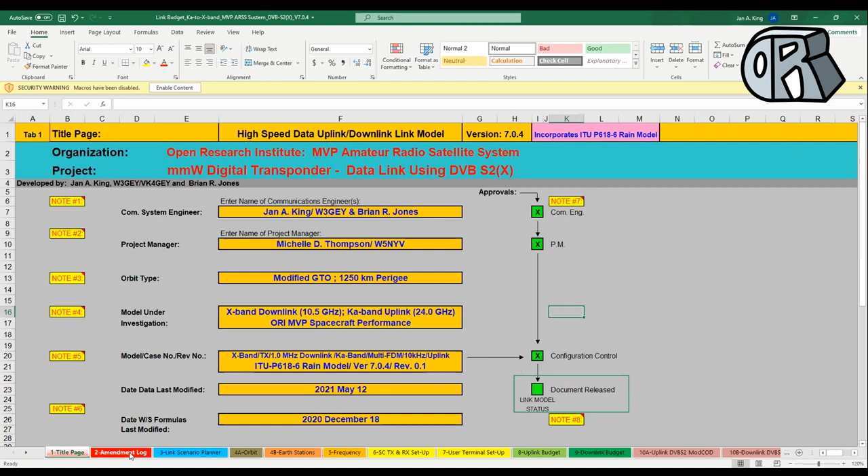Cool. So that was what the first page is about. And then the second page follows up. Every time you do a revision, this is what the revision tree looks like for this document. So it's been revised, and you see it goes all the way back to August of 2010. And some elements of this actually go back to about 2001. So this is long in evolution.

And what I try and do is use colors in a specific way. And I do this on every single spreadsheet I do on any subject: I make the blue cells the entry data, the yellow cells the results. And if they're black or blue, it means I can probably change it without stepping on the formula.

If I modify a cell and it's just a white cell with black text, I'd kill the formula, and I might as well start over, because the spreadsheet probably won't work after that, or I won't be able to change some parameter at all once I've screwed that up. So it's always a good idea with my spreadsheets, since I haven't password protected everything in them, to save a clean copy of it.

So you always have a fresh copy in case you step on cells, which I do to myself all the time. So that's it. Oh, I see something I forgot to do.

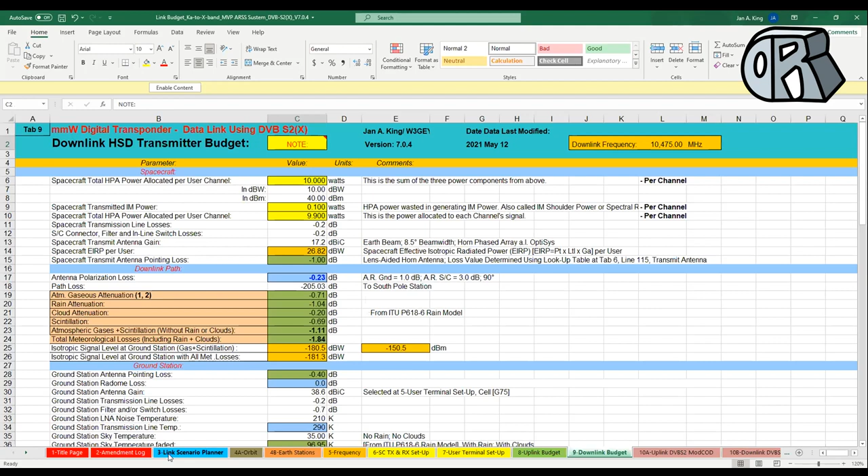Let's see, look at the downlink here. No, it's still a valid copy, so it's not going to prove that I'm doing it. Yeah, we ran into this before, because it looked like a valid copy on my Macintosh, and you said that's impossible. Yeah, right up until you change one of the critical cells, it will work. Yeah, because you had me. So the as-delivered copy works, and then after you make one modification, it won't work anymore. Right. So that's exactly what happened.

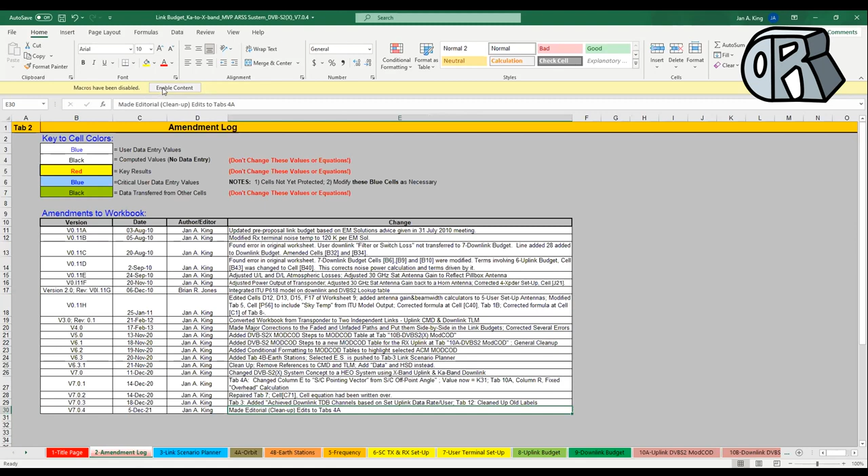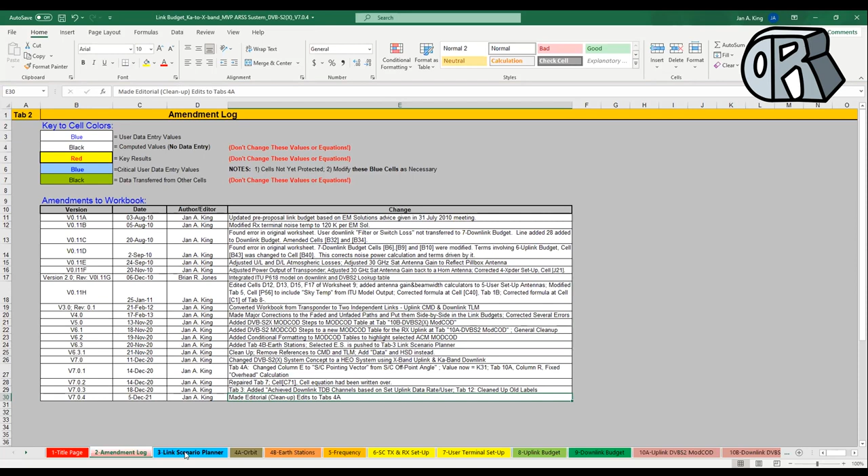Yeah. So if you've done this properly, you should get this inquiry here, where it asks you have you just enabled or disabled the macros, and so you enable the content, and so then now we have made it so that the ITU rain model will work in this Excel spreadsheet, and we got to still solve that problem for everybody.

It turns out the fix I gave you works for older versions of Windows 10, but not after about Windows 10.4. I think you and I discussed this, but there was a point beyond which, if you've got a newer piece of software, it will not recognize 32-bit words explicitly. You have to tell it some piece of information we haven't figured out yet, so it knows this is a 32-bit piece of software, not a 64-bit piece of software.

Exciting, and that's where we're hung up right now on that. This machine is an old machine, it uses an old version of Windows 10. And so when I put that DLL file into my System 32 folder, it does it and it works properly.

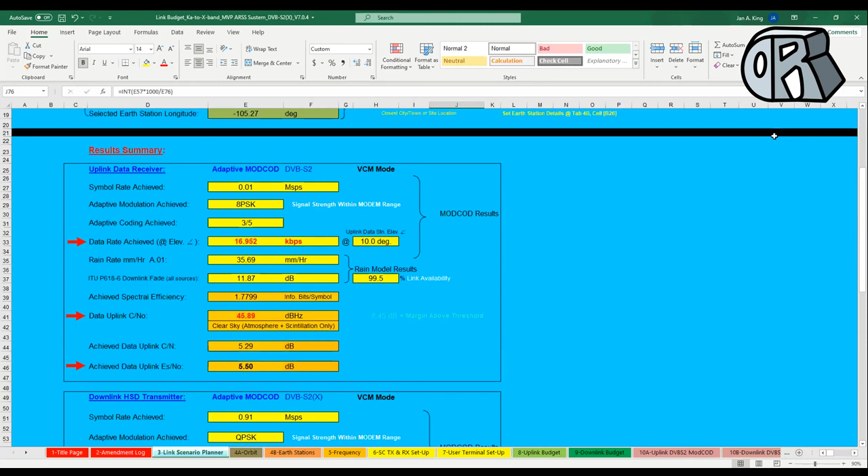Okay, so the way you drive this thing is I've put in what's called a scenario planner, which allows you to make quick changes to things you want to find out. And these are all the things in the blue area here. I've got two methods of changing the antenna size. One is changed on another sheet I'll show you, or I can alternatively use another antenna here. So I have two ways of defining antennas.

Specifically, on the user terminal setup, I do it there, and the other way is to do it here. The upper one assumes that the antenna size for the uplink and the downlink antenna could be different, which could easily happen in the amateur service. Whereas if you have the common antenna for up and down, it assumes you might have a diplexer or something, with two different feeds on the dish. So it depends on which one you'd use there.

I select the receiver bandwidth, but the way I've got it set right now, it's kind of from some old commercial stuff. It gives you an option of what ones you can pick. And if you don't like that, you have to go over to this section over here on the right and load in different options. And that's kind of clunky right now, so that's one thing I don't like.

So I've got it set now so the receiver bandwidth is very narrow and the transmit bandwidth is as wide as it can be. That means we're kind of operating the downlink as a combination of all the uplinks. So think of the downlink as a TDMA and the uplink as an FDMA, but it could be an FDMA or CDMA type of link. Right now, I'd say this is just until this was socialized so we could figure out what we really wanted to do. But this assumes 10 kilohertz channels, and at these microwave frequencies, that's pretty narrow to try and keep track of.

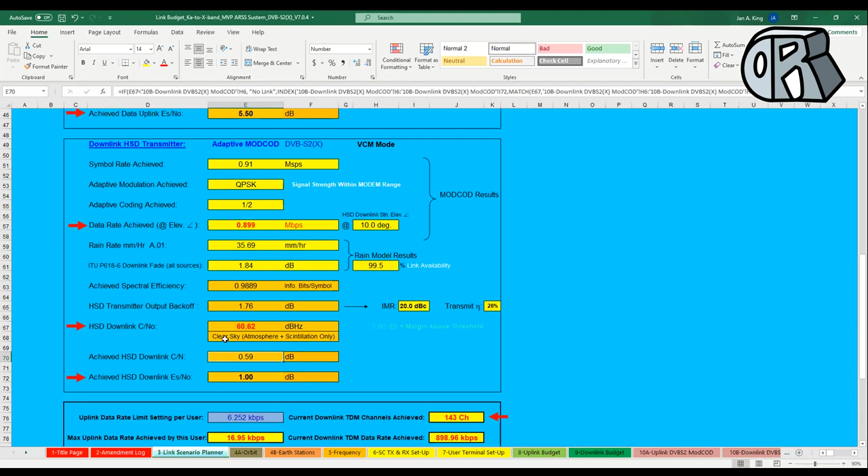It's really cool. Okay, now I put this new thing in here because it's a discussion area. If you assume that every bit that goes up, give or take some control bits, is going to have to come back down, then the downlink capacity—my metric here has been that with a 6U spacecraft, I wanted to be able to tell the commission that we could support a minimum of 100 voice grade communications conversations, which means 200 users minimum could be supported with this asset.

So if I use 6.25 kilobits per second as the threshold for the data rate that must be closed by the average user, then I can have an average channel count on the downlink based on the fact that I could get 899 kilobits per second. If I had to divide that into 6.25 kilobit chunks, I could support 143 channels.

However, the link on the uplink supports 16.95 kilobits for this particular user. So is that confusing in any way?

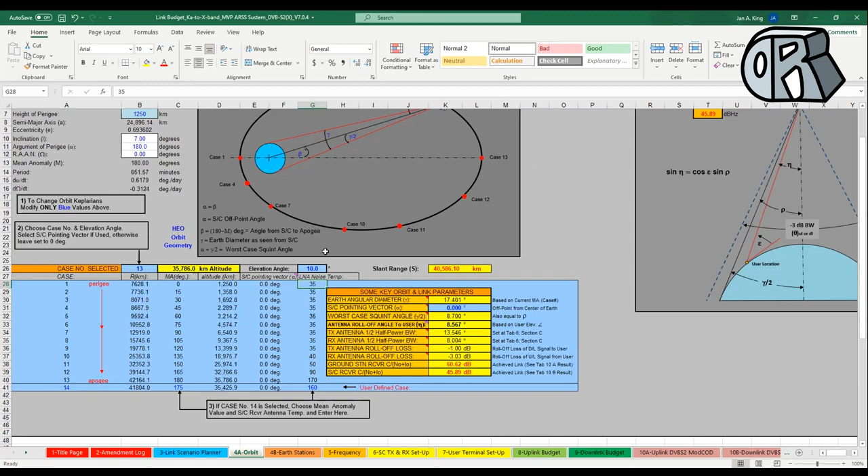So anyway, what happens here is I can pick any spot I want around the orbit. Now, there's some parameters involved.

This alpha value is what am I going to do with the boresight of the main antenna that I'm pointing the spacecraft with. In other words, if this is a dual frequency antenna, the boresight of that antenna could be offset from the instantaneous line between the center of the Earth and the center of the spacecraft. I could off-point from that, but I've made the assumption here that value is 0, and you'll see it expressed in this cell.

That's cell K31. That cell allows me to offset the angle of that antenna. But what I'm assuming by putting that at 0 is that alpha is always 0, regardless of which case I pick between case 1 and case 13. Another way of saying it is I'm always nadir looking with that antenna.

So is that okay? Well, what kind of station keeping is required to do that? Normal station keeping that you would require for any LEO system, or any system that has an antenna with the gains of the kind we have here. And we can talk about that.

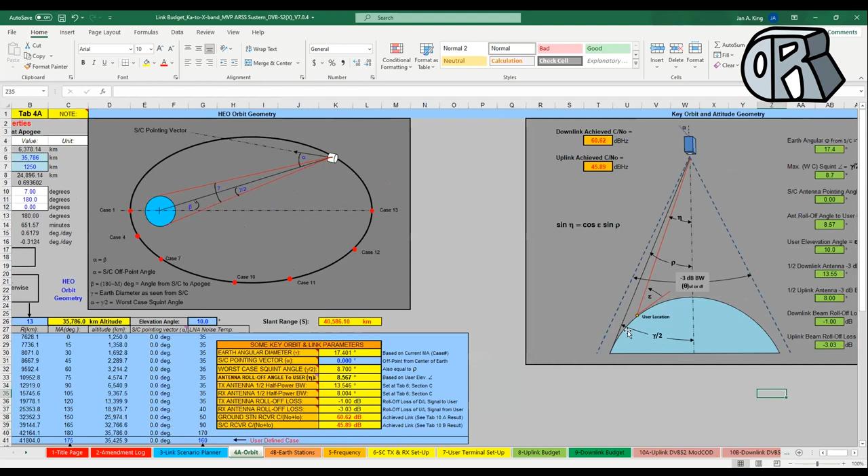And it's telling you also what the nominal period of the orbit is. Here we go. I can't draw my own. There. Okay, now I got it.

All right, so over here on the right, what we have is a pictogram of what's going on. You see that parameter up there at the top, alpha again. So that's how much I'm off pointing this thing. But it's telling you now where, with respect to the user, is this beam I'm going to place.

So you can see that the zero elevation angle, which is the rho parameter here, is defined, so you can see how much of the Earth is illuminated in degrees by that angle. You can tell what angle the user is at relative to the beam center. So the beam is going to be centered on this line. And then I don't recall anymore what my blue cone is.

But anyway, again, I can see what uplink and downlink I've achieved. And these are all, this is just an observation table. You don't change anything in this table because you'll see there's nothing that's blue. But the main thing is you can see for this user at 10 degrees elevation angle, how much downlink beam roll-off has occurred and how much uplink beam roll-off has occurred.

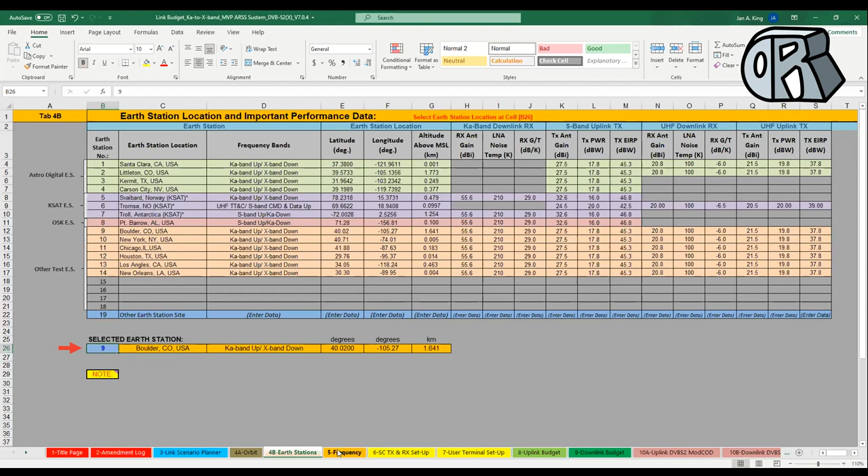Okay, the next one's the standard gobbledygook. You got to put in the mean uplink frequency and the mean downlink frequency. This displays the bandwidths, the path losses. It's a summary giving you the elevation angles. Again, almost every data sheet gives the slant range, everything you need to know about the link. If you've got a bandwidth, it's also telling you the upper edge and lower edge of the band here. So if you modify the bandwidth in this channel, it gives you all the right numbers there. It's just a handy spreadsheet thing to have.

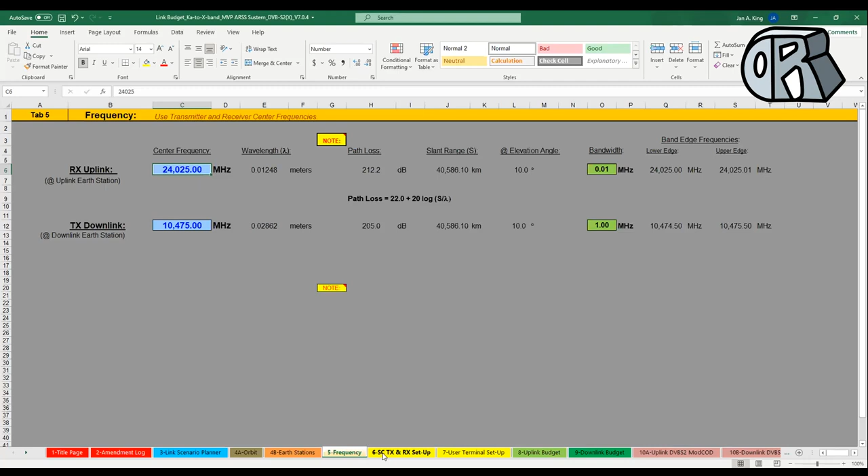Very good, all right. Now we get on to the serious stuff. This is how I set up the transponder - this is the page that sets up the transponder. I probably won't go into a lot of detail here, but again, remember, I only changed the blue values.

So what I've got, and this you'll find, of course, not a big surprise, is one of the most critical parameters in the whole system is what is the maximum transmit power.

Wally, to your discussion about intermod and things like that, I can set in the output back off that I use, and then depending on how much I back it off, the transmitter DC to RF power efficiency will change. So if I put 3 in here, this is going to drop down to like 20%, but the intermod will get better. So you have to know for your SSPA or HPA that you're using what the 1 dB compression output power is, how much you want to back it off.

At that back off point, what is the efficiency? Because it's also going to tell you how much spacecraft power you need. On the final page, it tells you, okay, you need this many watts if you want to run the system this way. Then you have to measure probably either the noise power ratio version of the intermod or the third order intermod products, whatever you want to do, and you can represent that there. But that's actually used in the final to subtract off the power that's creating the intermod from the useful power of the transmitter. So it's actually used in this system to offset the power that's wastefully used in producing intermod.

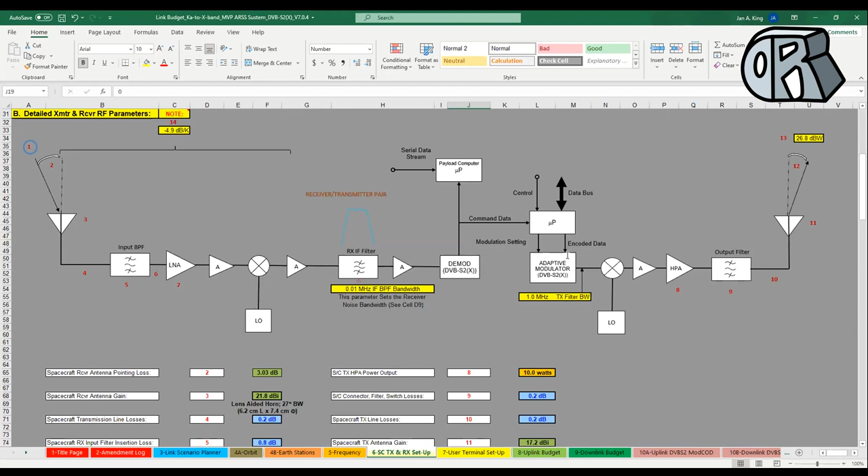Then it shows you a little pictogram of what the transponder looks like, and it gives you the ability to change all these parameters. So without belaboring the obvious, the one that you're going to be most interested in generally, here's where you put the antenna pointing loss.

And it's telling me that's coming from another data sheet too. That's over in the Orbit 4A tab, which allows you to set the pointing loss. But the one you're going to care about is I have 2 antennas in my version of the system.

This one for the uplink is a lens-aided horn. It has a... that doesn't sound right, that's not right, it's not 27 degrees, is it? I think the beam width is a little narrower than that. It's about 20 degrees, and it has a gain of 21.8. I think I've got a bug there.

Then you can set all of the usual things for the noise, which establishes the system noise temperature. And over here on the transmit side, it's telling you, yeah, you picked up 10 watts before. Then it allows you to have filter losses and line losses going to that. And it says your antenna gain is 17.2.

This one has a 16-degree beam width. And I again have a pointing loss, given by one of the other spreadsheets. I've got in there for the pointing loss allowed 1 dB. That gives me a net EIRP of 26 dB. And it also calculates, for those who care about such things, the G over T.

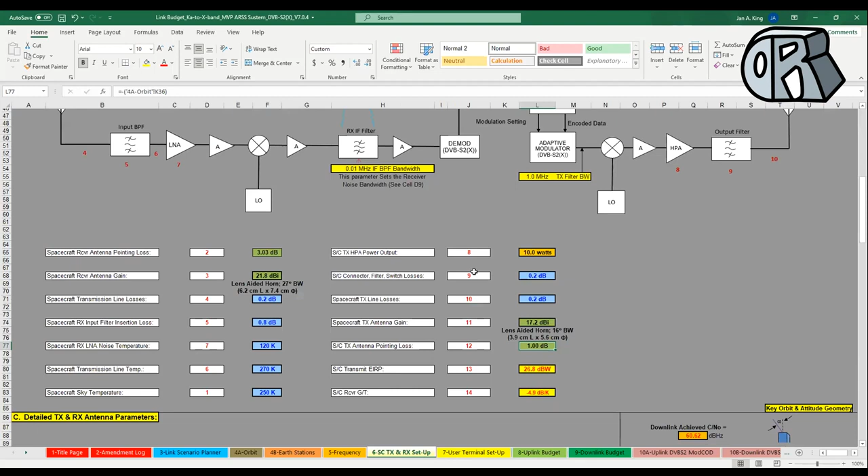But okay, let's go then back to here. So we're still calculating, but you see there's a lot more. No, okay, here it is. Here it is, okay, so this is to properly define the antennas.

Now you'll see we have our friend over here, this graphic again, because it's useful in setting these to see what it does. What we've got is a frequency of thus and so. If the antenna... now this assumes, guys, every antenna is going to have a different kind of equation to set its gain relative to, and its beam width relative to, some parameter of the antenna.

So just assume that this is a dish that I'm doing. It's the size of the dish that I would need with this aperture efficiency in order to produce this gain, and it has this beam width. So I was right on the beam width, okay?

So an antenna that's 7.4 centimeters across at 10.5 gigahertz, and there's no parabola, there's no dish that's going to have an 80% aperture efficiency. A good high one would be 60-something percent. So this is telling me this is a horn antenna. They have about 80% efficiency, and their aperture size isn't that different.

So this is a little bit of a fudge, but what you want to do is get the approximate antenna parameters between the antenna diameter, if you call it the equivalent of a dish, and the equivalent dish aperture efficiency, such that it comes out to meet the gain you know for your horn. So I know I have a horn with 17 dB of gain, and I bump this up until I get that gain.

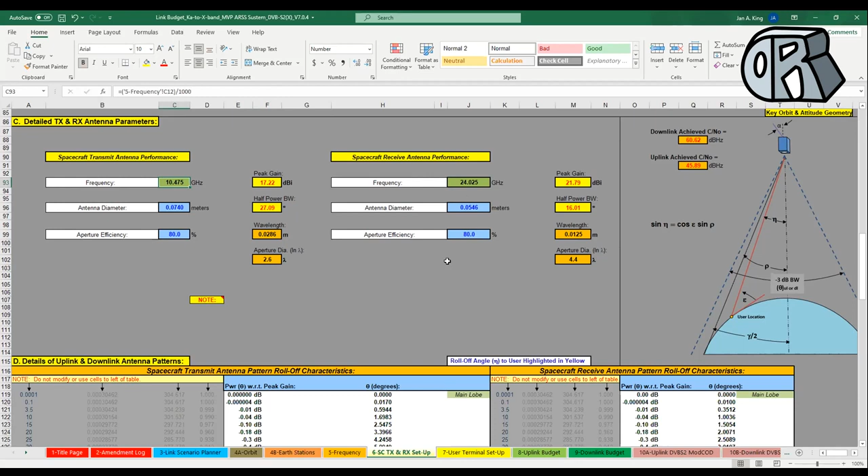Now, once I define them, I used another tool I developed a long time ago, and I say, okay, if I put that antenna in and I assume a sine squared theta over theta squared, which is what you'd call the standard linear taper beam pattern for a dish antenna, it works real well for a horn antenna too. This is the angle from boresight over here in this column.

This is the angle from boresight in this column, and this is how much the beam rolls off. So this is the transmit antenna beam. And what it's saying is, this is the roll-off you get in dB for this particular angle.

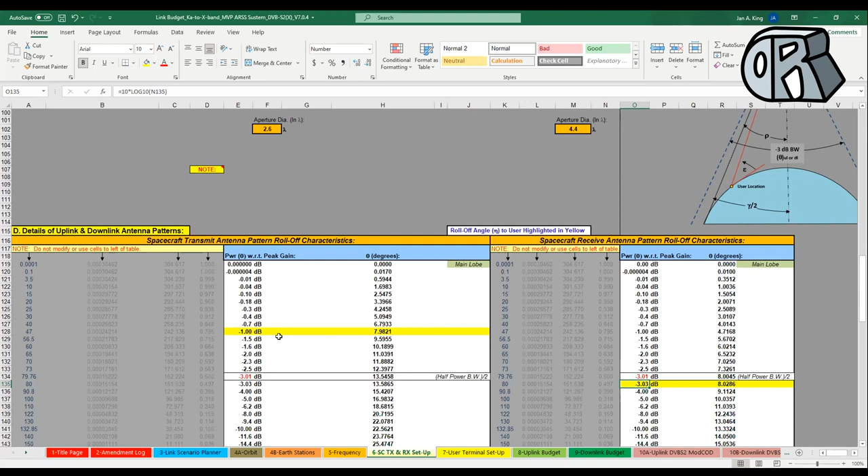So as I change the link parameters, this yellow line dynamically moves up and down the page. It's telling you where the user is relative to the beam pattern. And as we move off, look what happens if the beam pattern moves down to this area, which it very well will. I'll have a loss of infinity in dB. Yeah, wow, I mean, 328 dB.

So you're in the null. And so, when you're in that null, you're not going to communicate. So that user, the ring all around for whatever elevation angle corresponds to that case, all the way around that ring, around the Earth, centered on the Earth center, there's not going to be any communications.

So you have to plan how that works in the way the system operates, where you are in the orbit and that kind of thing. There will be times where certain elevation angles will be in a null scenario, and there'll be some cases where it'll actually be able to perform and the link will close all the way out in the first side lobe.

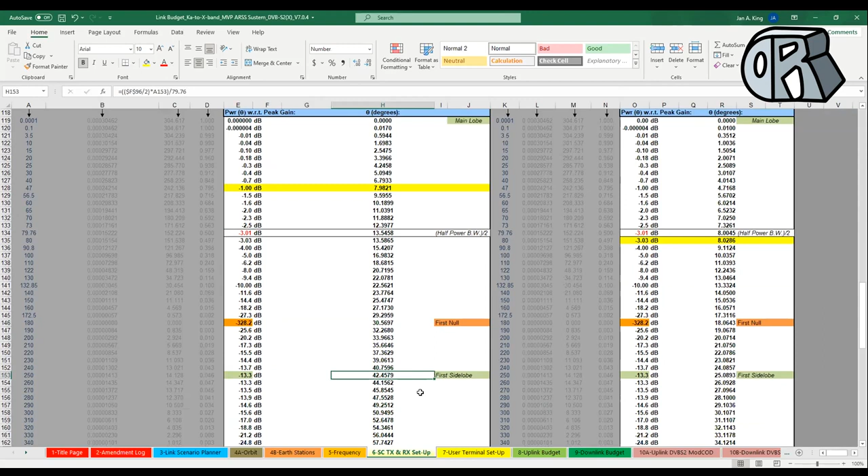We can show some of the cases here, but you have to be aware that as you move away from apogee, if the beam can't adapt, then two things happen. One, the user will be, on average, further off the beam boresight. And second, the spacecraft will be closer to the Earth, so 1/r² is a lower path loss. So the link will just improve because the path loss decreased.

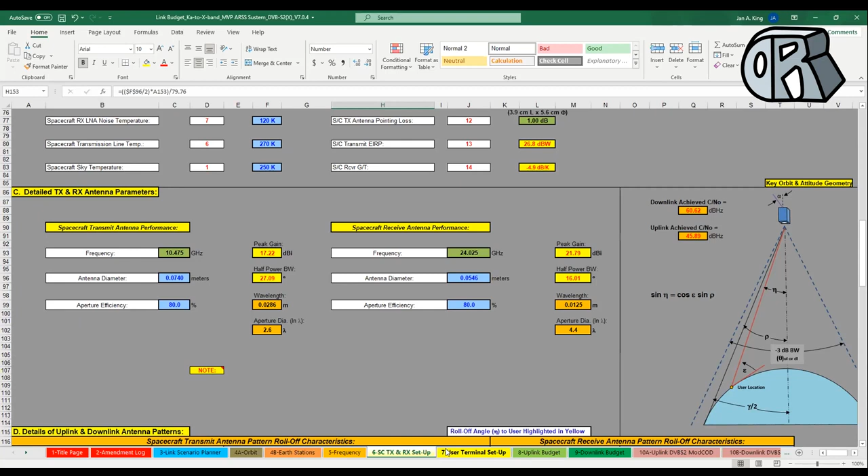So all that is figured out in this link model here. That finishes with the spacecraft setup. Once you've done that, you've set up everything you can, and then you have to go to the users. And this is a lot more easy to figure out.

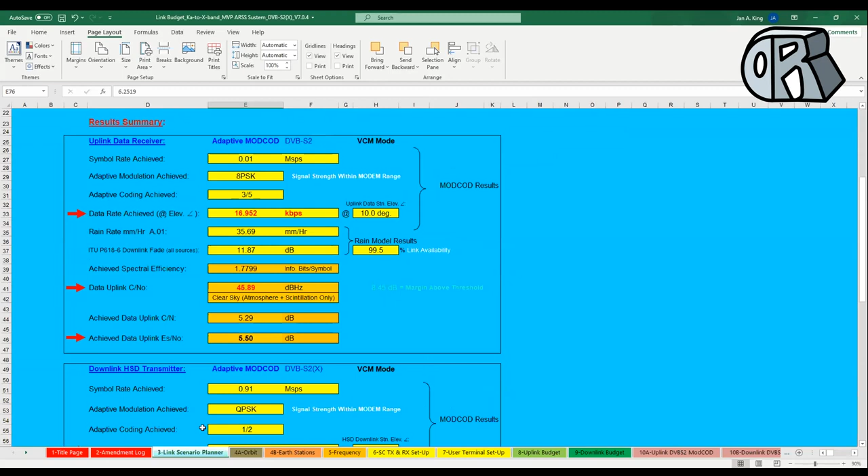If you play with this antenna here, and I say yes, then it will apply to the link equations, the link budget, this antenna, which has this gain and this beam width. If I select no here, it goes over and will select the gain you picked off that other choice on the link scenario planner. Let me do that real quick. Up here at the top in the link scenario planner, you can check this box and uncheck these boxes, and then you'll be using that particular size antenna.

This is a little bit complex, I agree. You'll be controlling it from this box here. But you see, it tells me I've not selected this. If I say no, then it says selected over here and not selected over here. If I say yes, it swaps them around - selected, not selected. And if, again, I say no, no, and I go over to the link scenario planner, it will have changed the check boxes. These two become...

No, that's interesting. Actually, I have to select no on the other one too. And that's correct. So I have to go down here and say, nope, I'm not going to use this antenna.

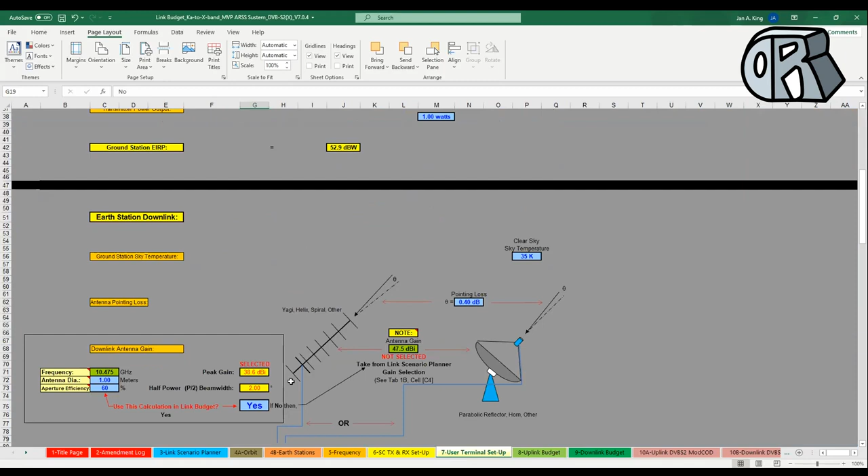Now I'm operating in what you might call a duplex or diplexer mode, where I have the same antenna and it goes through to a diplexer, and you sort the transmit frequency and the receive frequency in the diplexer, and then you've got two coax cables, one going to the transmitter, one going to the receiver. So you can do either mode of performance here - you can assume the user has two antennas or one antenna. Yeah, and that's how you...

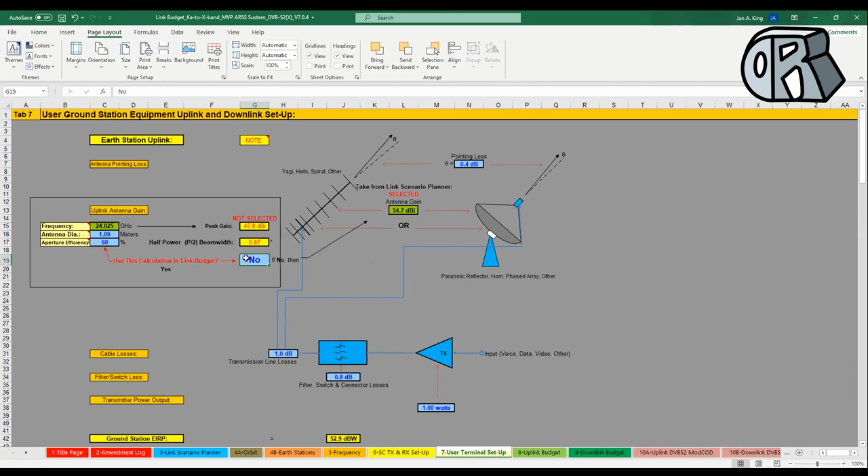That's pretty trick, and it is not... there could be an explanation here. Eventually - oh, there is, yeah. Let me see - is there like the notes on the page? Probably - oh there it is. Okay, yeah, thank you. I try and put all these notes, and by the way, got to use the notes sometimes to figure out what's going on.

Yeah, that's pretty trick though, that's a tremendous amount of customization. Here's the key one. Okay, yeah, all right. So we got the user terminal sorted. What I did here, and now this is how I am using the spreadsheet, is I put a 1 meter antenna in for transmit and receive, so I could play with these parameters while I was doing it.

And I've got 60% aperture efficiency, which would be like an offset fed user antenna. So I assume the user is using a microwave antenna he would have bought from his TV dish store, where he gets it and then modifies the feed for his use. Yeah, but basically it's an offset fed antenna, so it's a little tricky to point for the average user, because the boresight doesn't align with any physical feature on the dish.

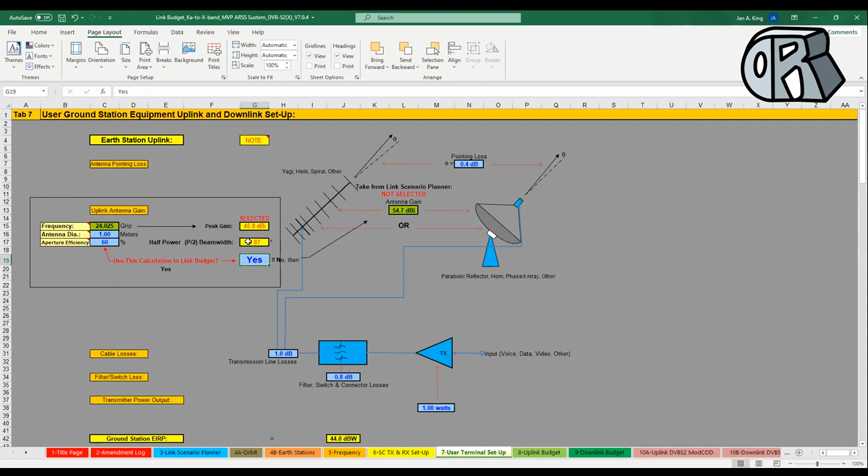So it's hard as hell to make sure - you can't just go out with your eye and look at some reference point in the sky like a star and say, okay, I'm about right. You've got to calibrate your system. But anyway, that's what's in here right now: the cheapest antenna I could get for a guy was an offset fed 1 meter dish, and it already has a beam width at our frequency of 0.87 degrees, which is damn narrow.

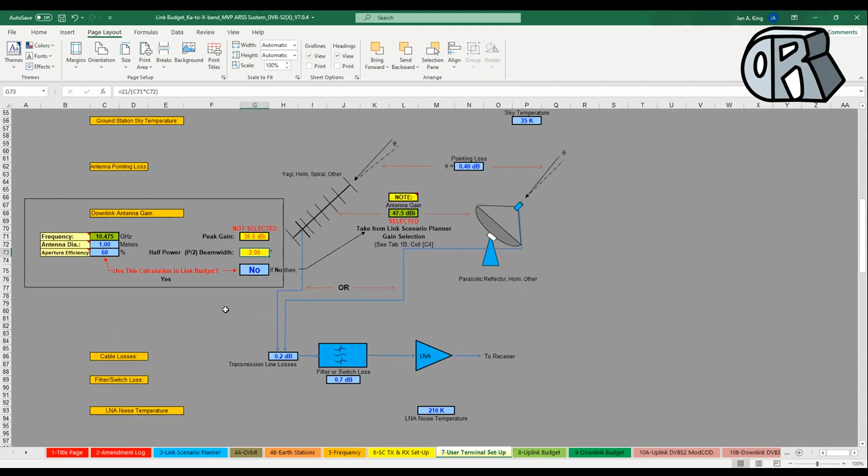Same size antenna down here for the user on the downlink, which goes to the issue of, if I make it easier for receive than transmit, then he can slop around in 2 degrees - which is still pretty damn narrow, but he can slop around in 2 degrees rather than having to point to 0.87 degrees, which he needs for transmit.

Also, with transmit, if you put the right software feature in the spacecraft, he might be able to walk himself in if he gets feedback from the spacecraft saying, okay, your signal to noise ratio right now in the channel I'm receiving you on, using some GUI or something, is 6 dB. Oh no, now it's 8. Oh, it's 9. Okay, so he uses that to walk it in. He can walk in the transmit, whereas he needs the feedback he gets from his receiver to lock in the downlink beam.

Right, and I assume there's going to be some kind of beacons here and there. We haven't talked about frequency referencing and all that, and that's a whole other chapter. No, in this thing, it's a whole nother chapter, and we do have some work there, and some engineering and some ideas.

So this is the area for the ground station where you put in whatever the LNA temperature is, noise figure. I don't have it. If you want, I can put in noise figure here, and I've got a little calculator. I can put a little calculator over here in the empty space, which allows you to go from noise figure to noise temperature and noise temperature to noise figure, because hams are needing that all the time. So we can do that.

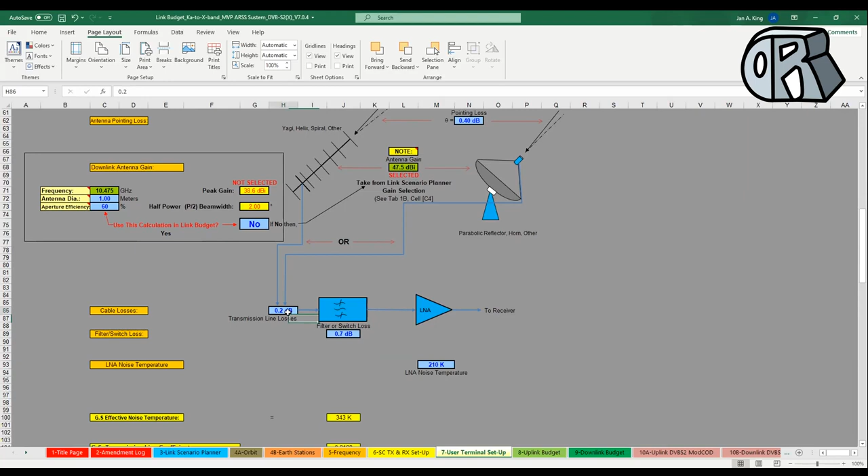But anyway, I've got it in proper engineering terms. So it's noise temperature. If you have a filter like a bandpass filter, typically the losses you want to get below a dB, and then whatever your transmission lines, you want this all very close to the feed so you get this loss down. We all know that, but anyway, that's where you enter the parameters.

Here's where the pointing loss of the ground station receiver goes, and this gets fed into the link budget. And it's good to know at any given frequency roughly what the clear sky temperature is. Right, and that will be very much elevation angle dependent. So the way my link budget works, it assumes kind of a constant value for that. And even in a clear sky, actually, that does vary a little bit.

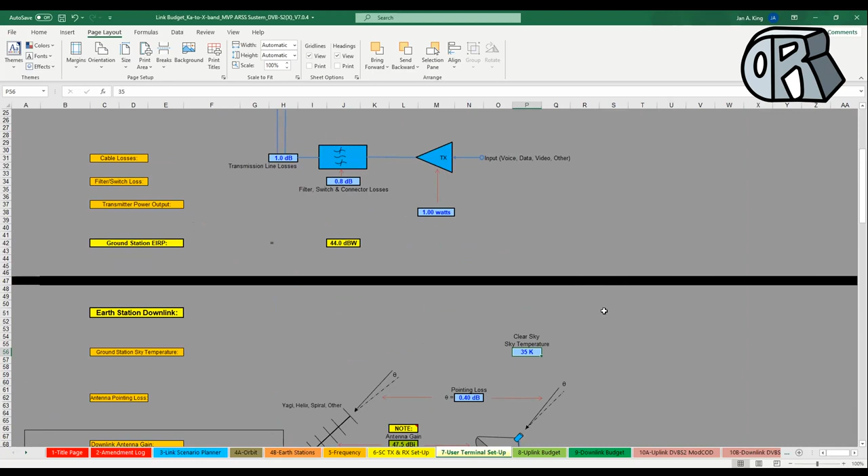So I call that a fudge factor. And what I have in there is my best guess at the fudge factor for that frequency and medium elevation angle. Okay, so that's blue. That means that's the responsibility of the user - anything that's blue here is expected, you've got to fill it in, and it will affect the link budget.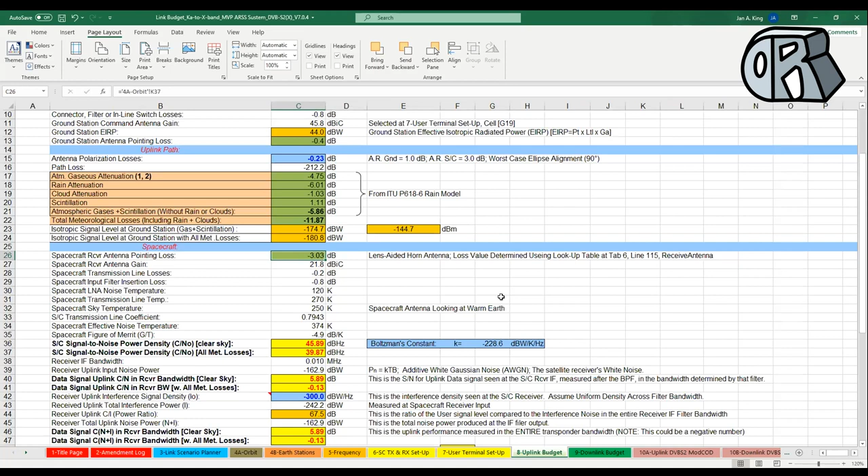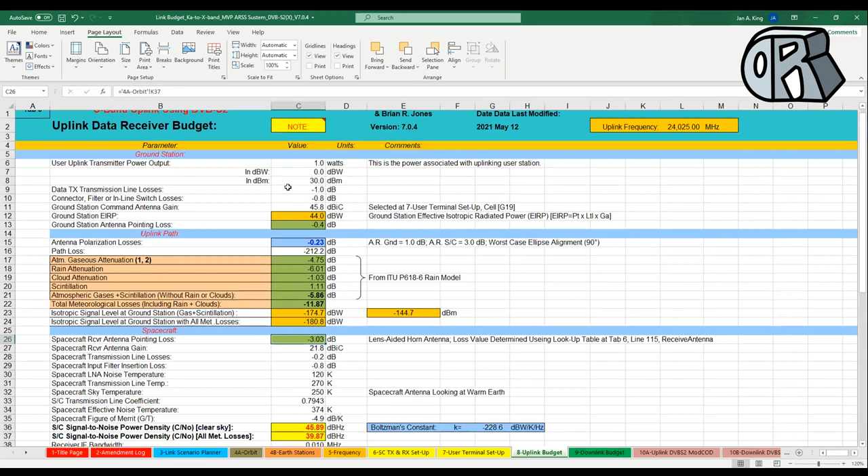So then we go to the links proper, and this should look like a properly documented and annotated link budget. And the most important part of it, it looks pretty much regularly, like you'd expect to see. It's got all the pointing losses. It's properly computing, and a parameter you need to know is the axial ratio of the antennas you're using. So you'll see, where the hell is my axial ratio?

Up here. Polarization loss. Okay, that's a big one. This is the main spreadsheet where you have to put the polarization loss. You guys, from some of my other spreadsheets - either get one of my other regular amateur radio spreadsheets, or you can implement the formula yourself. But you need to know the axial ratio of the transmit antenna, the axial ratio of the receive antenna, and then the angle between the two ellipses that are created by the two antennas when their axial ratios aren't perfect.

And what this is telling me is that the axial ratio of the ground station antenna was 1 dB, the spacecraft antenna was 3 dB, and it's the worst case ellipse alignment. So the two ellipses thus created are in as cross pole as they can get. And under those conditions, where I have a 1 in 3, the loss is minus 0.23. But that is a user entry.

And I realized that I've got lots of spreadsheets that calculate that, but I didn't put it here. And if a user is going to use this, he'd benefit from having this be an equation. But for big guys like us using this, I'm assuming you would know how to either calculate that or estimate it for what your system is. But the polarization loss is, to a lot of people, is a big deal these days. And so that's where you play with it.

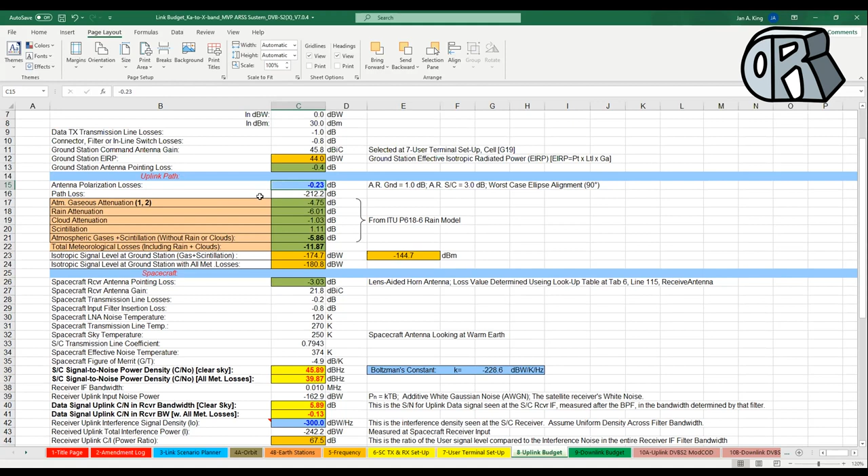Okay, and I wanted you to know that I do take into account - that's a downlink issue, so let's just stick with the uplinks. I don't deal with the linearity of the user on this link, Wally. The user's IMR, intermod ratio, or intermod losses is not really taken into account. I'm assuming that the ground station takes account of that in the transmit power here. So that's one higher level of sophistication I could add here that I haven't. However, I take care of that on the transmit side of the spacecraft. Yeah, on the downlink side, does it make sense to stick an implementation loss catch-all?

It's a good idea to put that parameter in there if the implementation loss across the ModCod steps is fairly consistent, then it could be easily put as just before the bottom line of the link budget on the downlink. If it changes by ModCod step, then you have to put it into the ModCod table. We haven't got to that yet.

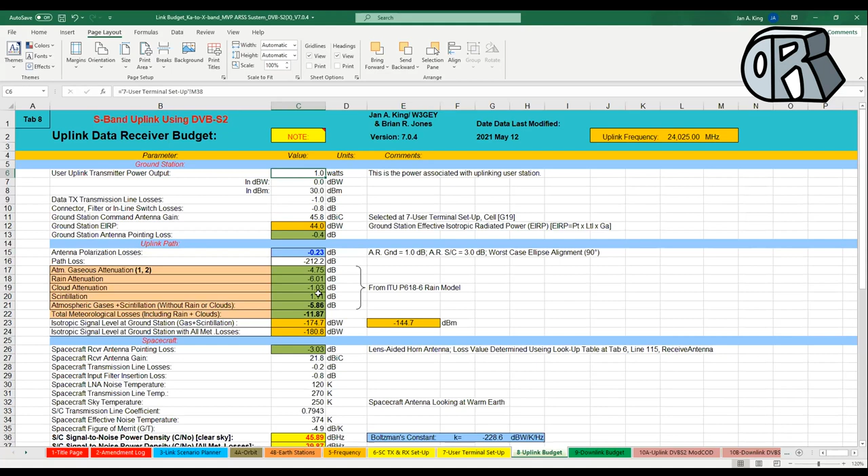So anyway, this is just everything standard, except what I'm doing here is I'm allowing you to pick between. Once we get into the part where the rain losses occur, all the rain losses coming from the rain model are plugged in here, and these are the sums of them. Then from here on down the link budget, I compute the rain-on case and the rain-off case. That's what you see, these two parallel numbers. You see them again here and here and here.

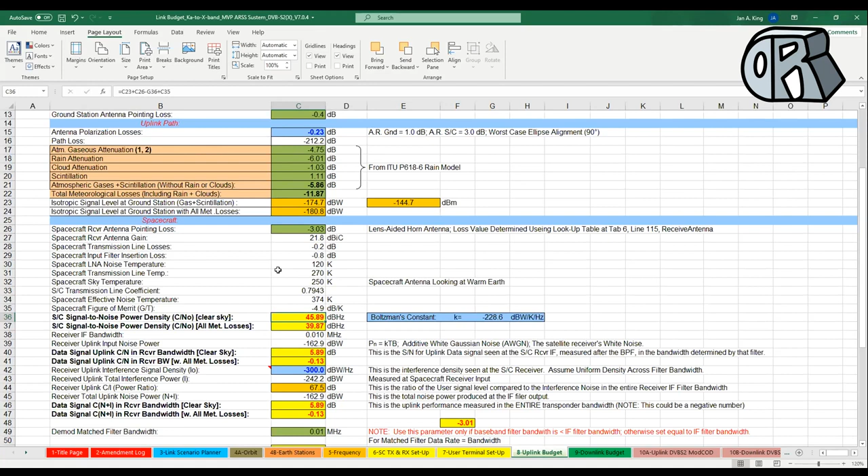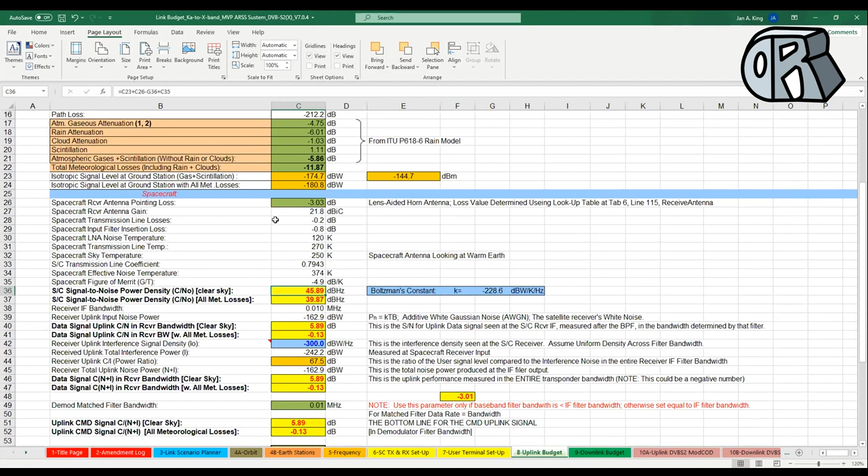So each time I apply some correction, there's two versions of the outcome, and they're carried. If I turn on the rain, it copies the worst value. If I turn the rain off, it takes the best value in each case. But the things I correct for here are the Met losses.

This is where I've computed the net effect. This is the number I would nominally use to do the ModCod table lookup. In other words, this is the end result of the link, except I haven't yet accounted for noise power in the receiver, and I haven't yet accounted for interference on the uplink.

If I've got an interference environment I'm in, let's say I have something producing white noise that's going all over my receiver channel, I can put in the density of that noise here, and it computes the noise power of that, and then it figures out how much that degrades the link. Okay, for that case, if you want to see it go worse, I go minus 200.

Okay, and you see the link goes to crap because I put a very high interference density into that case, into that scenario.

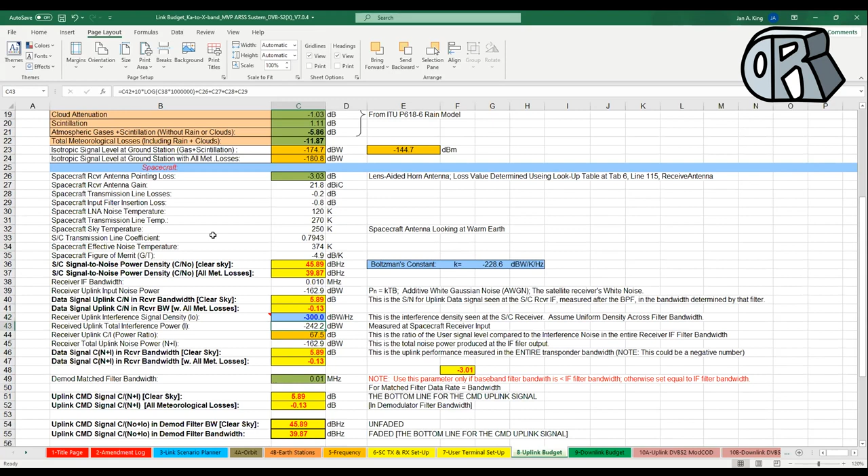Then I end up with the classic signal to noise ratio. It's the signal to noise ratio considering the noise also includes an interference, and that interference is defined by that blue box above. So if I turn off the interference so that it's really C over N plus I, but I is 0, then it becomes C over N. Anyway, that is the bottom line as far as putting it in terms of signal noise in a given bandwidth.

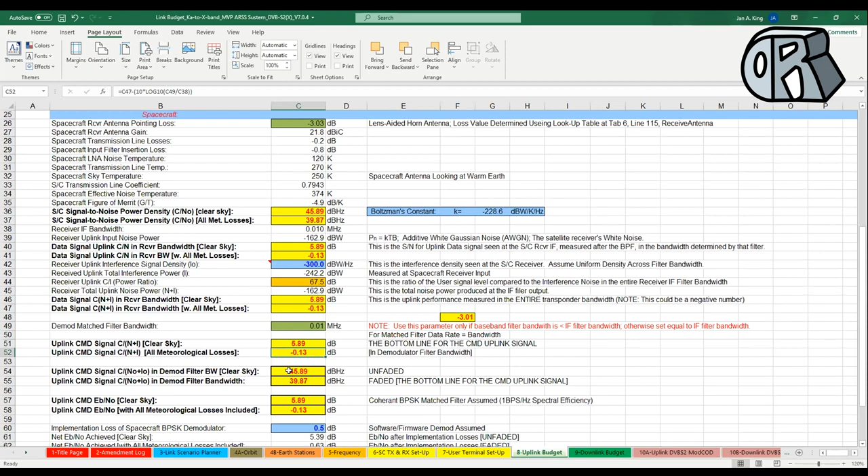There's the bandwidth. So I come up with the net effect. That's in the transponder, and then this is in the user's receiver. And since they're identical, it doesn't change. And then I have a clear sky and a sometimes called unfaded and faded clear sky, and C over N0 plus I0. So I take that one into account.

And that is actually the number here that I'm using in the ModCod lookup table. I also calculate, for the DVB-S2 table, if some people would like to know, the net Eb over N0 parameter. It's another way of saying the signal to noise ratio, but it's the energy per bit to noise power density number. And so that's given here as well.

So this part down here is where there is an implementation loss taken into consideration. But since I've essentially disabled everything down here, because I'm going on to the ModCod tables, and I'm using a DVB-S2 demodulator, fundamentally I haven't really used this, but here's an example where I put the implementation loss into the link. Prior use of this spreadsheet, I was apparently using it for a BPSK link, and I had assumed that the demod had a half dB implementation loss.

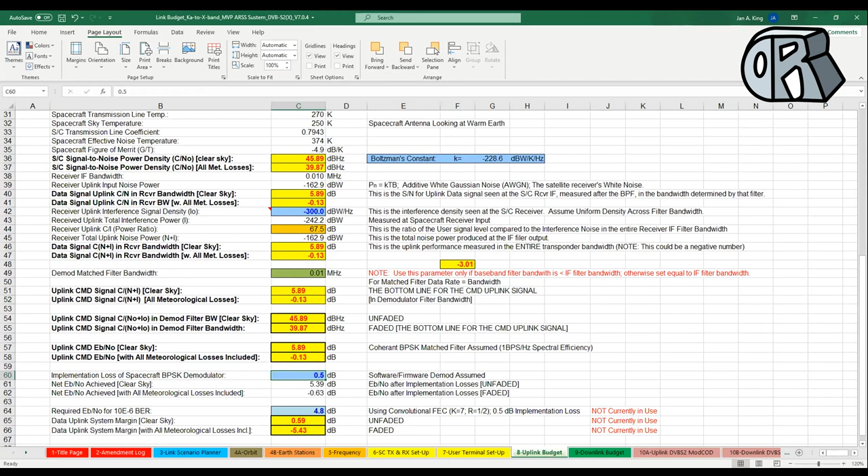Now, if we go to the downlink, the only thing that might be different here that you haven't seen before is I calculate the intermod power from the intermod value that's in here. So I say, okay, I got a 10-watt transmitter, but I'm producing intermod 20 dB down, say, so I have an intermod of 0.1 watts, that's 20 dB below 10 watts. So I'm losing 0.1 of a dB to the intermod.

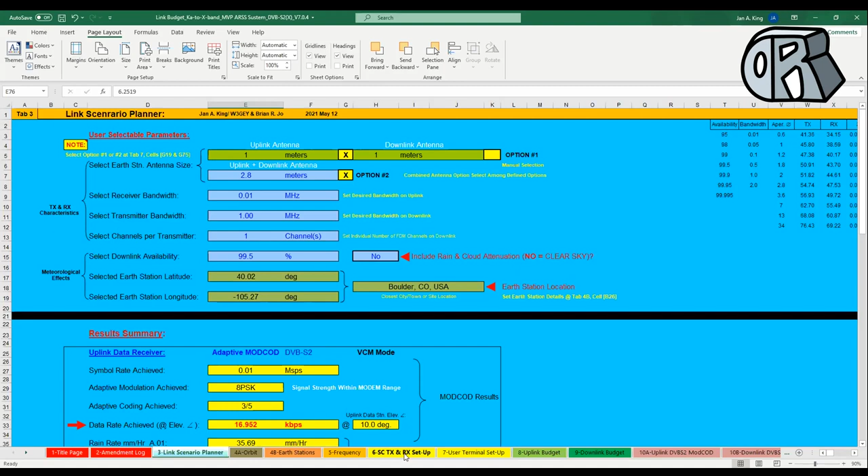So the real power I'm actually transmitting on the link that's doing some good at the demod is 9.9 watts. If I go back and make the intermod value worse, like using a Class C amplifier that's really crappy, the downlink, still 10 watts, now loses 1 watt of power to intermod, producing only 9 watts of real power. So 9 watts goes through the link to the other end.

Yeah, but if the trade-off is efficiency, that may be a worthwhile way to go. In that regard, you have to know what the efficiency hit is for a given intermod.

So if I measure 15, the way you'd normally adjust that, the big guys, when they do their transponders, just use a variable attenuator to set the output back off. So if I back it off, say 3 dB, I might have improved linearity, getting say 25 dB linearity. So I've got that trade-off: I now only have 5 watts of power driving the link, but it's a much more linear link.

And by the way, in the bargain, if I went to a higher output back off, the efficiency might go down to like 20%. That might be the circumstances for a fairly linear transponder with a pretty big back off. I don't know if that's enough back off to get 25 dB, that might have to be 6 dB or something. But anyway, you'll pay for it with efficiency.

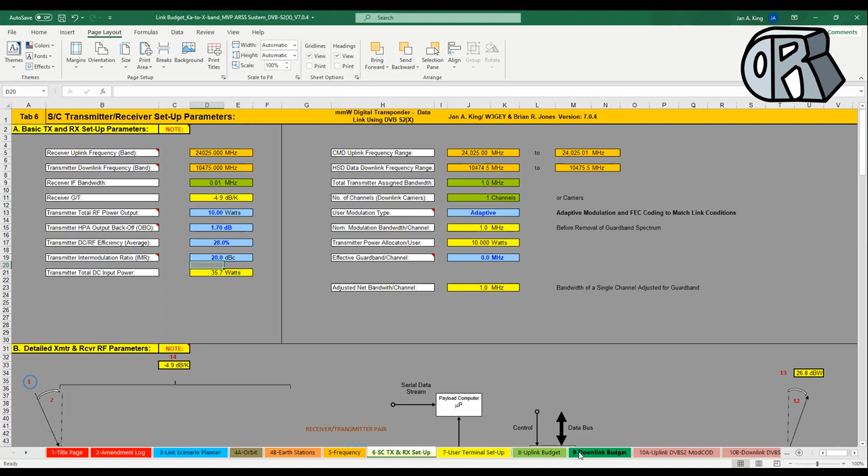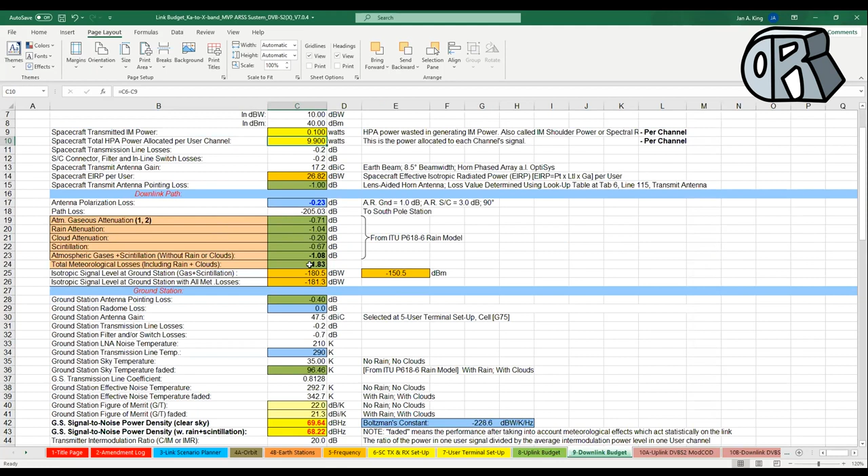Okay, so with that discussion, this link looks a lot like the other one. Here's all the rain effects, and you can see the rain effects are much smaller because this is at 10 gigs. The same things apply here, and there's the net result in C over N plus I. The numbers I really care about are these two numbers here, the C over N0 plus I0. That's what I'm using in the ModCod tables.

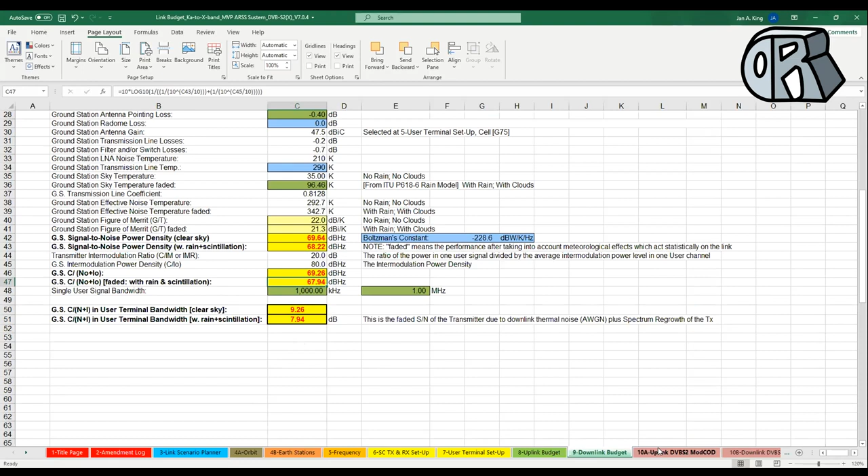Okay, cool. So what I've made adjustable here is I've got a 5% Nyquist roll-off, so this is a very, very sharp filter. For an amateur application, you might be able to use 10 or even 20% Nyquist roll-off and nobody would care. It would save probably power at the microprocessor that's making this filter exist. I assume it'd be a software-defined radio.

And the sharper the filter, the more recursive steps the filtering process takes within the software, and it usually chews up more. We use FFT, so it doesn't matter as much. But anyway, there's usually a trade space around using that parameter. To be honest, if we're at 24 gigahertz, nobody's going to care how efficiently we use it. But if you want to, DVB-S2X certainly supports 5% Nyquist roll-off.

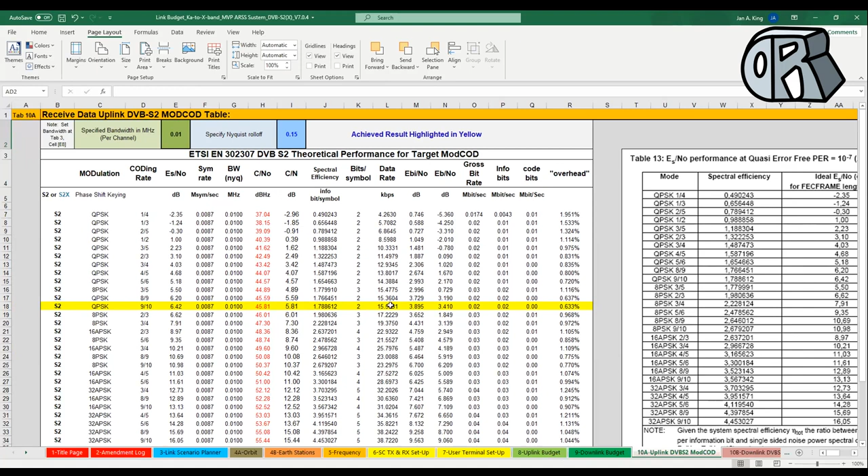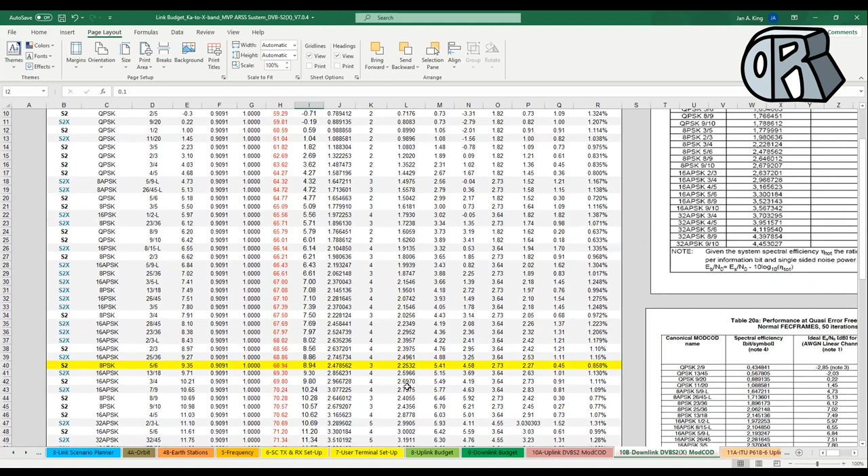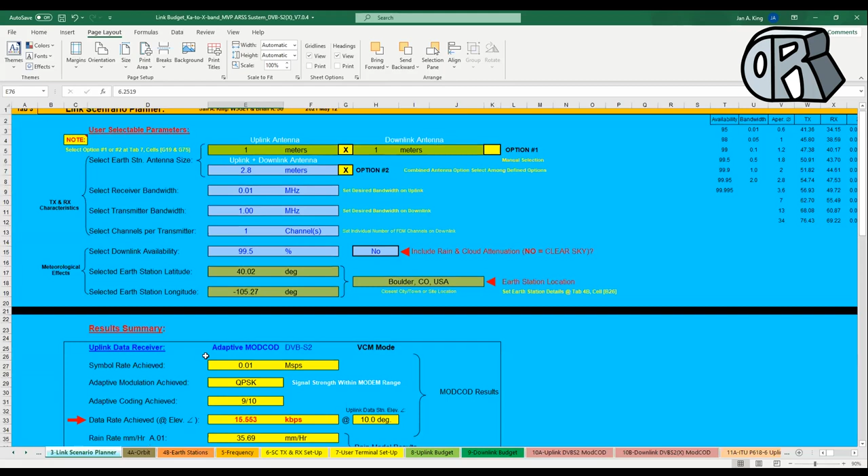Let me go back to the planner and see. So I changed something pretty big time. Now you can see, if I look at my measure, whatever I've done, I don't know why I've gotten that big - I'm getting 360 channels worth of use out. So I'm doing really well here.

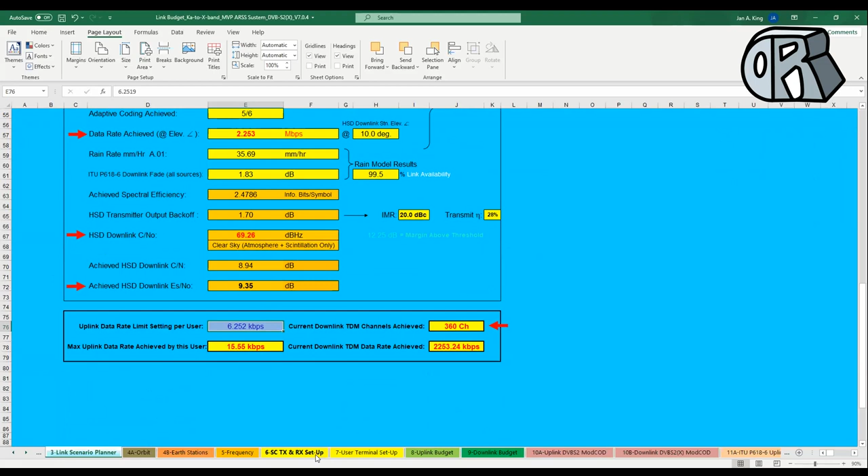And I'm wondering, the transmitter power is still 10 watts, 1.7, 20 dB - did I make the user better? Let's see, I got something wrong here. I'm using that one and I want to use this one. So this wants to be a yes.

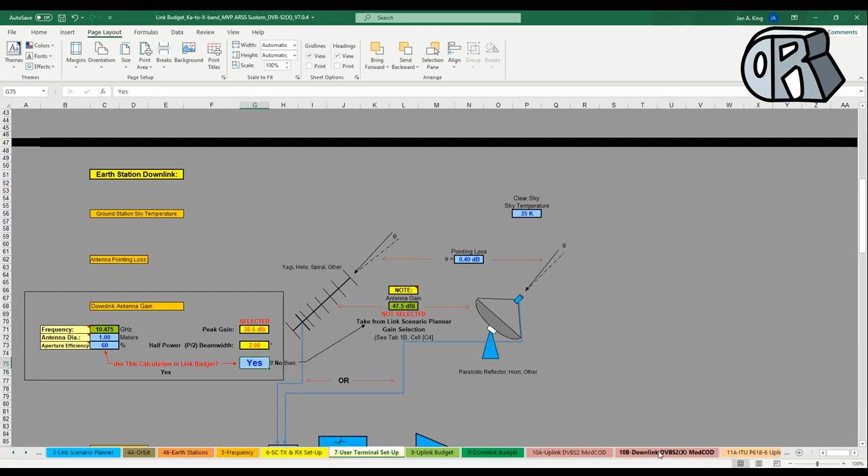Too much antenna gain there. So now I go to my downlink - now I'm back where I thought I should be. So I had too much uplink antenna gain. And so now this is what I'd expect. I've got just round about a bit per hertz, and I'm getting just 0.9 megabits per second of performance out of that link.

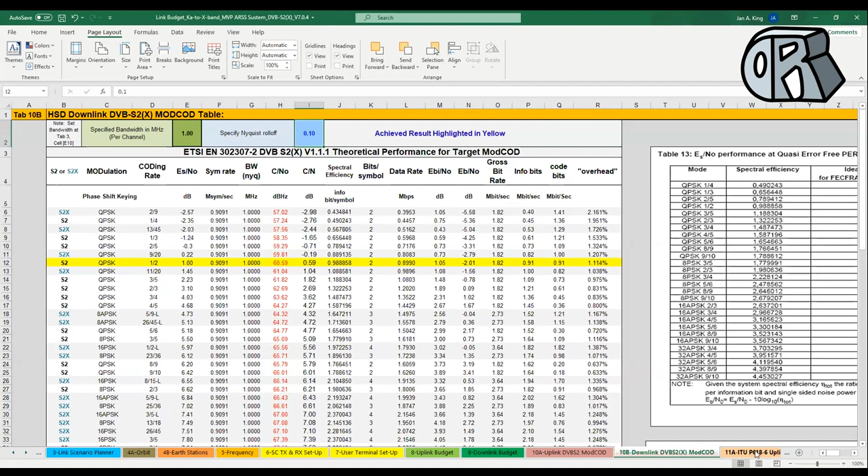The next thing I want to show you is how the rain model is working here. It actually uses the rain model twice, and this is what the rain model GUI that the ITU sends you looks like. You can see it's the ITU here because of how they're spelling degrees in French. All the green parameters are plugged in.

So I'm taking from that user selection, I'm plugging in his latitude, longitude, height, and whatever elevation angle is taken from the orbit data sheet. I've put in his downlink antenna size, also taken from tab 3, the antenna efficiency, and the frequency. This polarization parameter doesn't seem to work the way I thought it was, so I just put 45 in there and leave it alone. I think it's assuming a linear antenna and a geo case, so they're assuming the polarizations are misaligned 45 degrees. I don't know.

And then it wants the rain unavailability, and the one most everybody uses is the link rain availability, not the unavailability. So this is copied from tab 3, the link scenario planner, and put here. It then computes that number, and that's what the ITU rain model is actually doing.

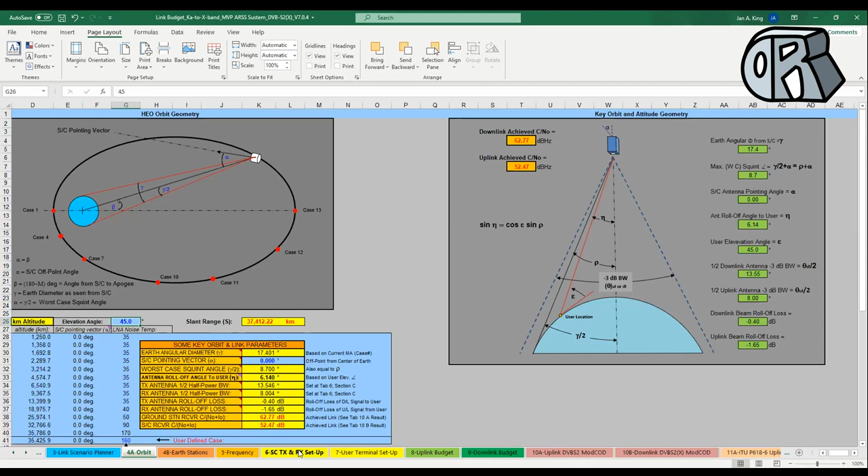All I'm changing for the link is just the elevation angle. Now that's already fed into that link model back there for the uplink. By going up to 45 degrees, the noise temperature has dropped down to 168, and the overall atmospheric losses plus scintillation has gone down to 3 dB. And without any rain or anything, it's dropped down to 1.37 dB.

So now it's become a kind of a useful radio link. Okay, now it works fine. But it's telling you that down at 10 degrees, that user is going to struggle. And that's something you got to figure out when you figure out how you're going to set up the transponder to make it easier or harder for that user to access the transponder.

So by setting up the transponder conditions, you can actually set what elevation angle, practically, the average user will be able to get down to before he'll lose the link. And of course, if he's in a wetter location, he's going to need a higher elevation angle before he can get a connection. Whereas if he has a higher elevation angle and he's in a drier place, he's going to do better. So all those things one would in principle need to parameterize in order to do the transponder setup the way you'd really like to have it.

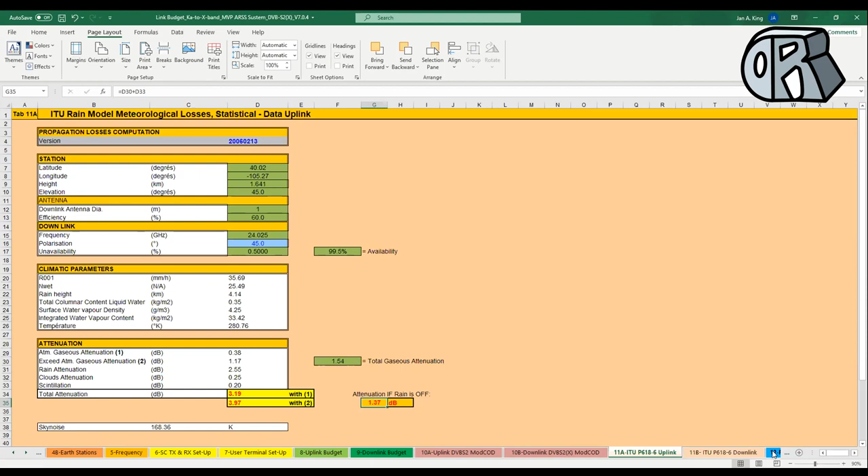All right, sounds good. And the last thing is a summary that shows you the results, and there's no changes in that, but it breaks things up by what the user's parameters are on the uplink, on the downlink, and then what the spacecraft parameters are. So that's all summarized there.

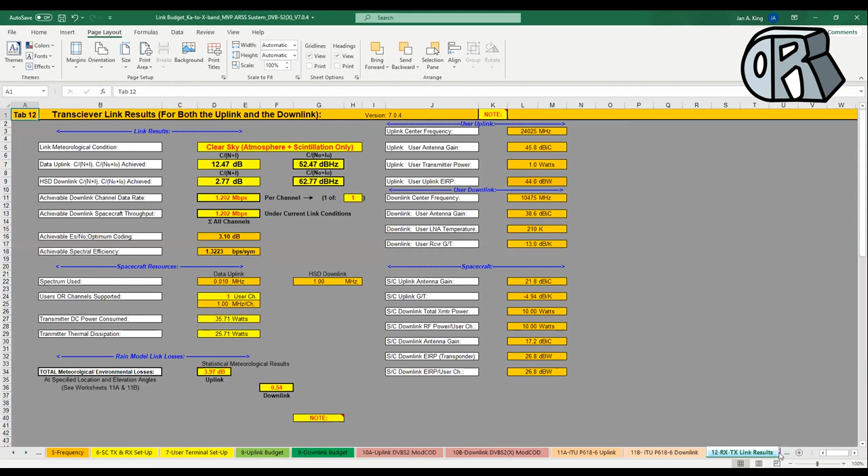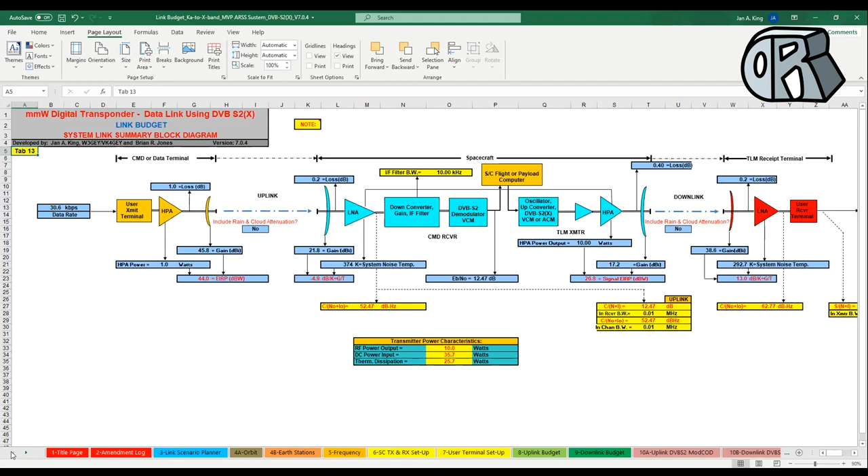And then here's a pretty picture that shows what everything looks like as you go through the system from one end to the other. So great stuff. I think you can see where the trade spaces are here.

And I see some trade spaces very clearly, due to rain, whether you have the rain on or off. And it's a very strong function of, regardless of where the user is located, his average elevation angle. And I think you can see that the overall system performance, how many channels of users you can support, where each channel in my definition was a voice grade channel. I use that 6.25 parameter, but that can be a different parameter, of course.

But in order to get 100 channels for the users over the whole range of different parameters, which you can change here, it's really hard. We'll have a baseline everybody can do, probably QPSK 1/4, maybe a half. And that will be a low power, 2400 bit per second. Everybody has that capability. But they may not be able to receive anything that's above QPSK 1/4, which is fine.